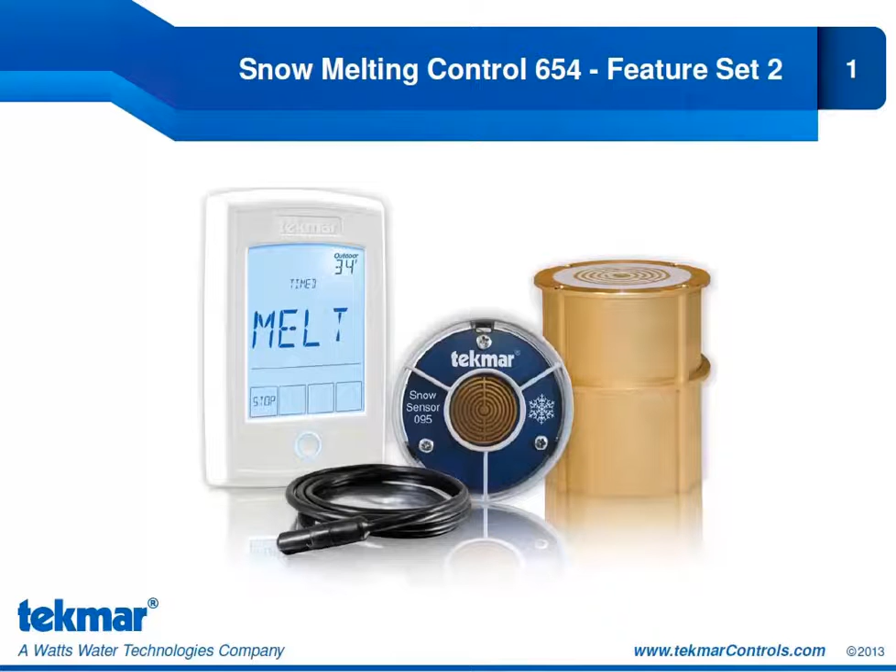This segment is going to focus on some features that are particular to the Snowmelt Control 654. If you did watch segment 5, you already went through some features that are particular to the sequence of operation of the 654. In this segment, segment 6, we're going to look at feature set 2, which are a set of features that relate to the performance of your snowmelt system.

The outline for this segment is to begin with the Tandem snow ice detection. Now that is a feature that we did mention when we looked at the applications because it was featured in application 2. We're going to go through it in a little more detail in this block and in a lot more detail in the technical block, which is our final block 8. We're also going to look at slab outdoor reset and slab protection as features for the 654. We'll look at exercising, alert output, and the new manual override for the Snowmelt Control 654.

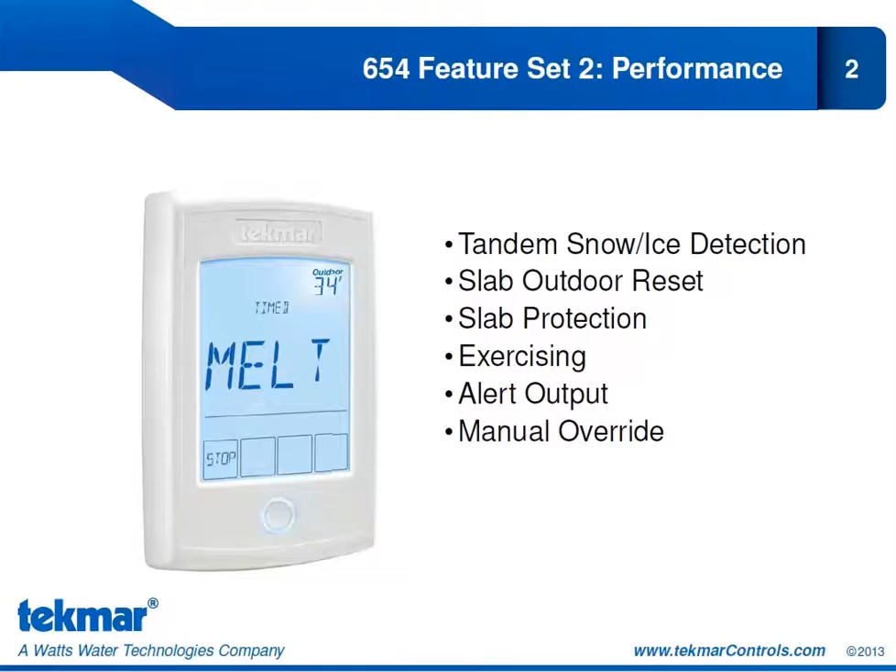We also might want to use this feature if it's a critical snowmelt area and we want to have a backup sensor. So we can be sure if one of those sensors were to fail that we will still be able to melt the slab reliably. We'll still have the automatic start and stop functionality from the second snow ice sensor. Now the way it works is either one of those sensors can detect moisture to initiate a melt cycle. But both of those sensors have to be dry to signal that melt cycle to end.

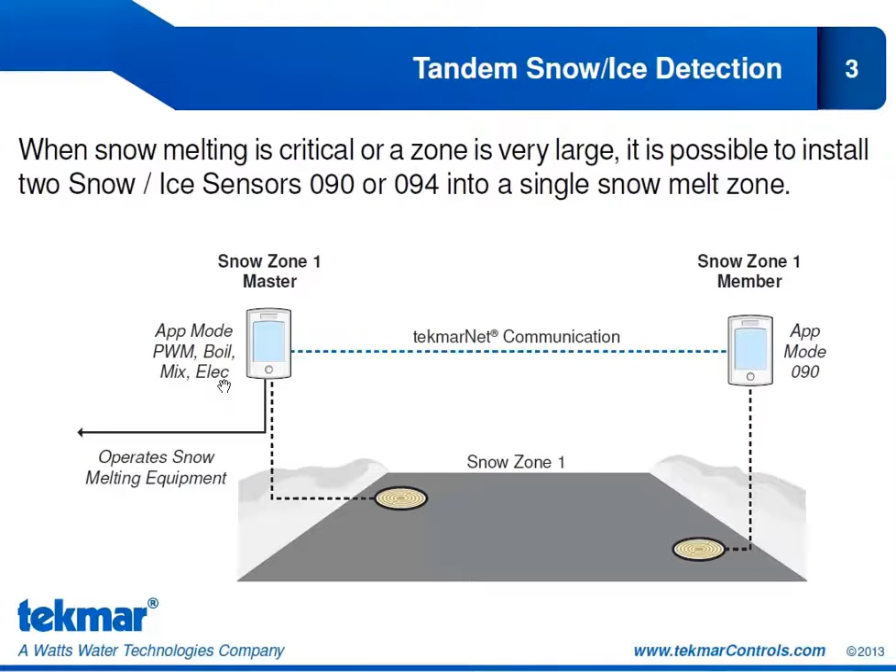The other 654 can be programmed for an application mode of PWM, boil, mix, or Elec, depending on what that 654 is controlling. And when you select this application mode, it automatically becomes the master. And this again shows in the view menu, it will say Snow Zone Master 1.

Now remember, we can connect up to 12 654s together, so we can have up to 12 snowmelt zones when using the 654. Each of those zones can have tandem snow ice detection. So what that means is, in a single snowmelt system, we could have up to 24 of the snow ice sensors 090 or 094 and be doing tandem snow ice detection in each of our 12 zones if we have 12 zones.

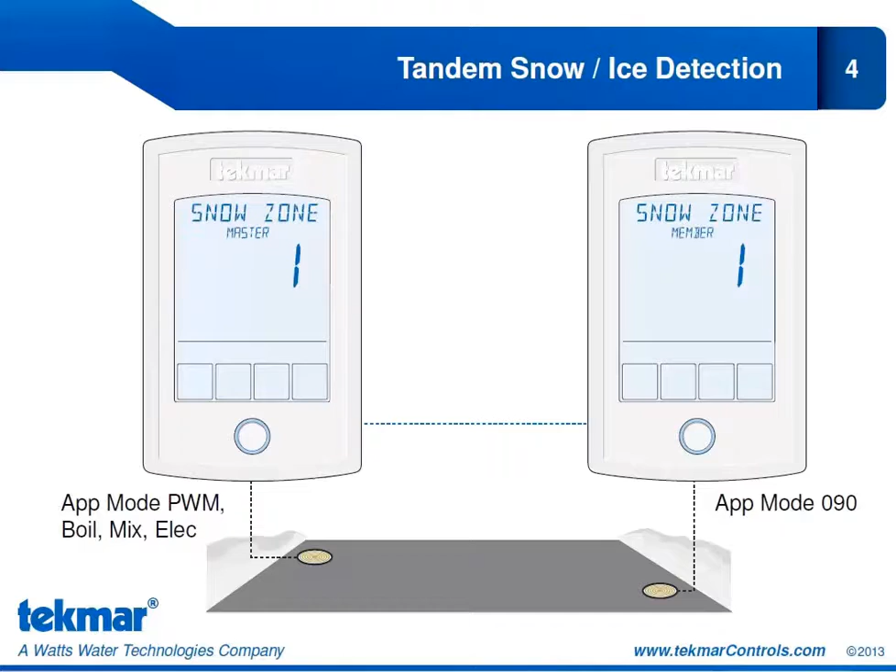Slab Outdoor Reset is a feature that happens automatically as long as we are measuring the slab temperature. So Slab Outdoor Reset allows us to maintain a constant surface temperature by varying the temperature of the core. So we will vary the core temperature as a relation to outdoor temperature. Obviously, the colder the outdoor temperature gets, the higher our slab core temperature must be to maintain that stable surface temperature.

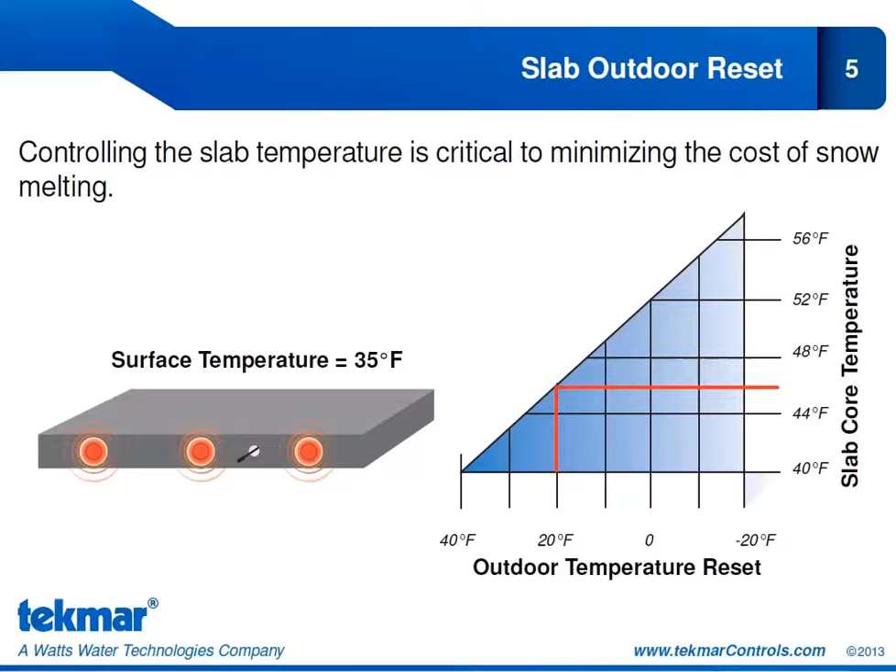At 20 degrees Fahrenheit, we have a slab core temperature around 46 degrees Fahrenheit. If we decrease our outdoor temperature to 0 degrees, our slab core temperature has to raise to 52 degrees to maintain a surface temperature of 35 degrees Fahrenheit. So Slab Outdoor Reset is something that's automatically done by the 654. We do that to control the heat delivery to the slab and minimize losses.

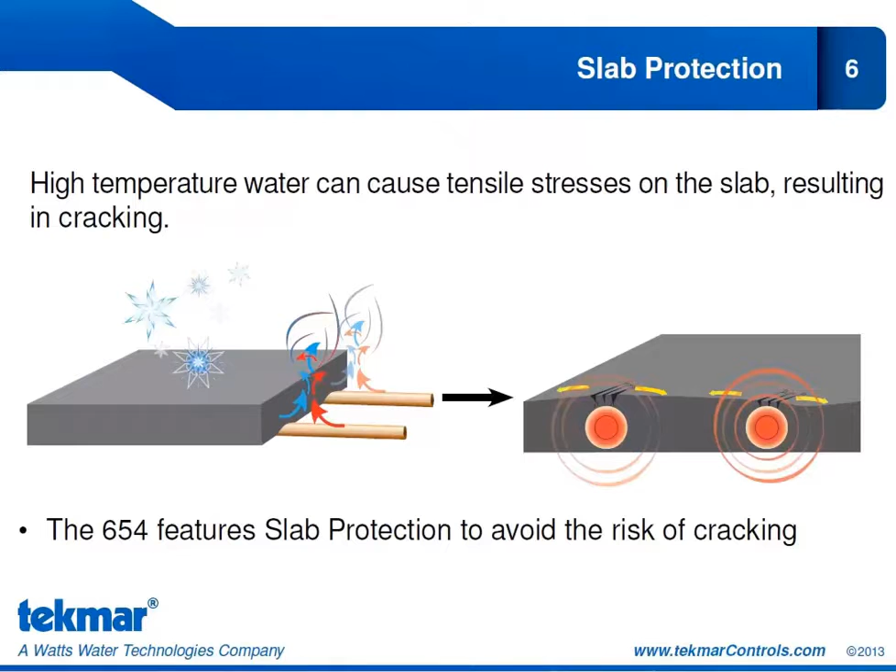To make sure that doesn't happen, the 654 features Slab Protection. Now this is a feature you can turn on or off. If you turn it on, then we're going to make sure that temperature differential is minimized so that there is no tensile stress on the slab. There is no thermal shock to the slab, so we avoid the risk of cracking.

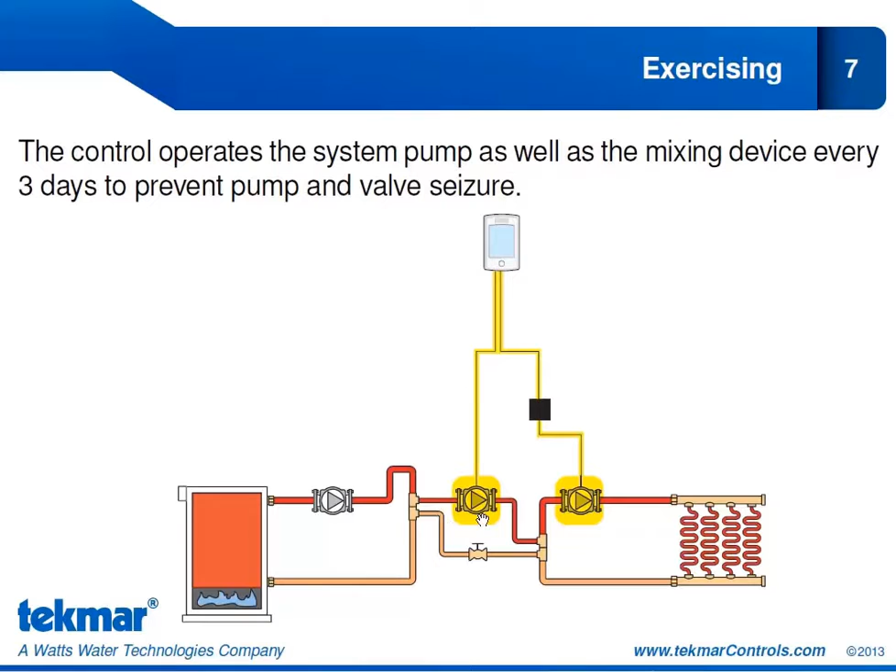If your 654 is operating a hydronic snowmelt system, then we will automatically operate the mixing device and the system pump every 3 days to prevent any type of seizure. So automatically every 3 days, your system pump and your mixing device, it could be a pump or a valve, is going to be operated to prevent seizure.

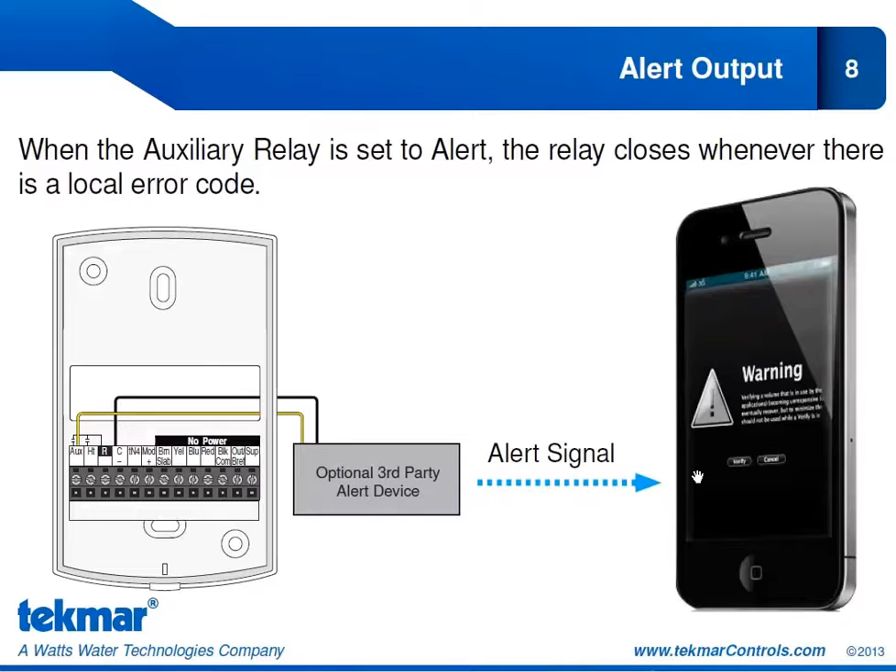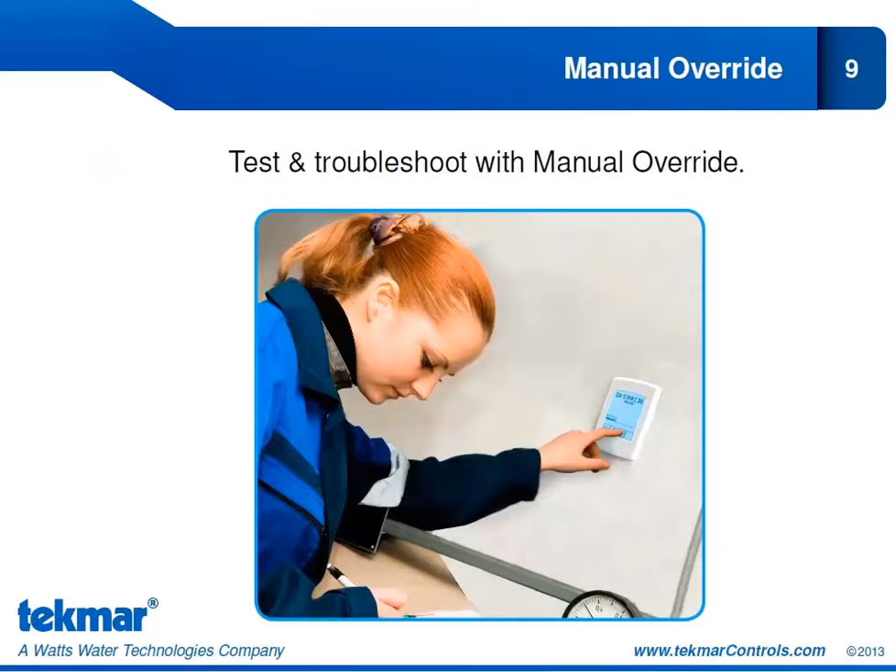Those of you who are familiar with the Boiler Control 284 are familiar to some degree with manual override. Now, manual override is something that we have included in the Snowmelt Control 654 as well, so that you can test and troubleshoot the snowmelt control. So many times we get calls at the start of the season and people want to make sure the snowmelt system is working. And we kind of, in the past, have had to fool the system into thinking it was cold enough to operate. Well, now we can use manual override and operate equipment as we need to.

So there are 6 manual override modes. We have the auto mode, and that just operates the system as normal. We have a purge mode for hydronic systems to purge the system of air. We have the max mode for hydronic systems as well. And what the max mode does is operate the boiler supply or the mix supply, depending on what your system is, to 130 degrees Fahrenheit.

We have the test mode, which would be for electric system, and that operates the electric equipment for 10 minutes. The hand mode will allow you to operate individual pieces of equipment separately. And then we can use the manual override of off to turn our snowmelt system off without actually cutting the power. So these manual override modes are a real benefit to the new Snowmelt Control 654 so that we can do the testing that we need to without having to trick the system, so to speak.

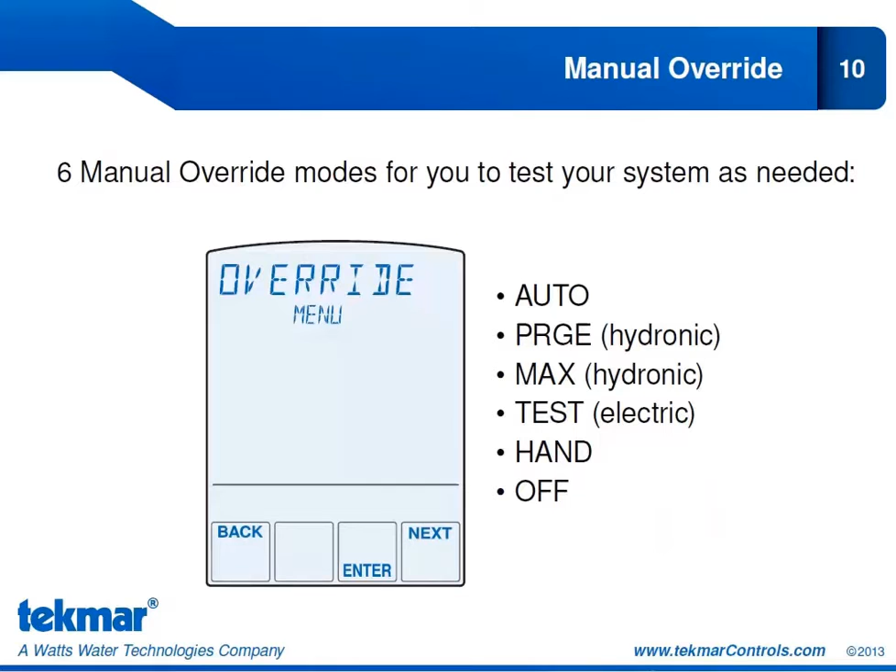In summary, in this feature block, we talked about slab outdoor reset and slab protection. We looked at the tandem snow ice detection. We talked about exercising and using the auxiliary relay for an alert output. And we talked about the new manual override menu and how it can be used to test our system as needed. Now there is one more feature set block left to cover, and that feature set will talk about the tekmarNet communication features. So stay tuned for that, and we'll talk to you again soon.